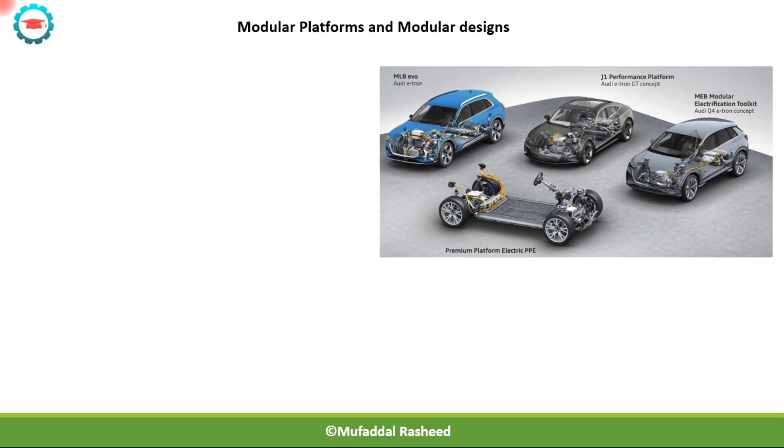Now we will have a look at a very important concept in advanced automotive product development, which is modular platforms. Now the modular platforms are based on the concept of modularity, which is the practice of designing systems in the form of modules and attaching them together. Modular platforms are a cluster of systems which are bundled together and can be used for multiple vehicle products.

As you can see over here in this example, this is a platform. Now this platform will consist of many different types of systems. As you can see from this example, this becomes the base module, or it is called the platform. It includes the tires, the suspension, the powertrain, the steering systems, the supporting systems for the powertrain, the battery pack.

In this case, this is an electric vehicle, so it will have a battery pack, and it will have the frame which houses the batteries, and the subframes which have the powertrain as well as the suspension system. So this becomes the base platform of the vehicle.

Now this can be adopted to many different types of vehicles. As you can see, it is adopted to this vehicle, and the other two vehicles are also having the same platform. The only difference over here is the body and the cabin. The cabin will be different, but the base, the foundation of the vehicle, which is this module right here, will remain the same for all the three. This of course is a very advanced design methodology which is used commonly in OEMs today.

Now this requires that you design systems in such a way that you are adapting them to multiple different types of vehicles. So in one way the design has to be rigid, in the other way the design also has to be flexible to adopt different types of vehicles. Now to do this is very difficult, and hence a lot of effort is put into the design phase, in which these modular systems can be developed, which can be flexible and adaptable to many different types of vehicles.

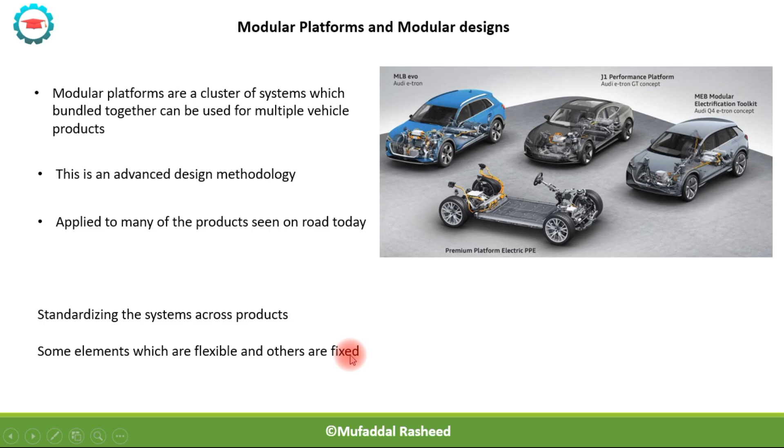The modularity concept of having various types of modules which can be mixed and matched with each other to get different types of products is a very important and powerful philosophy which is applied in this kind of design.

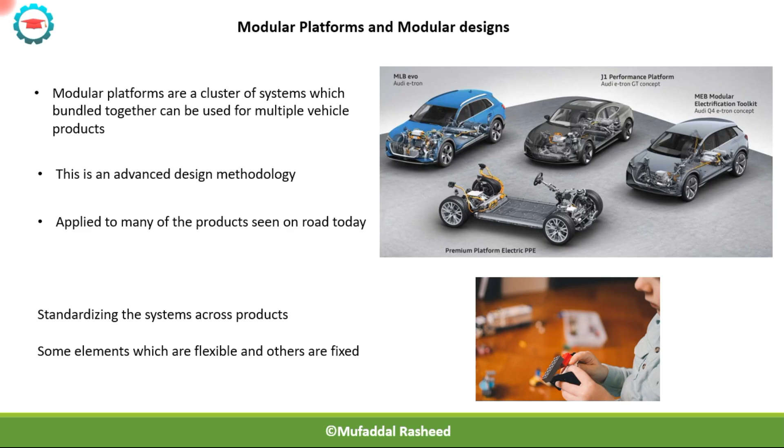Now we will have a look at the key characteristics of a platform. The platform forms the foundational structure of the vehicle, including the front, rear and the underbody. This is applicable to both body on frame and monocoque types of vehicles. Monocoque vehicles generally would include portions of the body or BIW as well, along with the base structure of the vehicle. We will be able to understand this with examples in the coming slides.

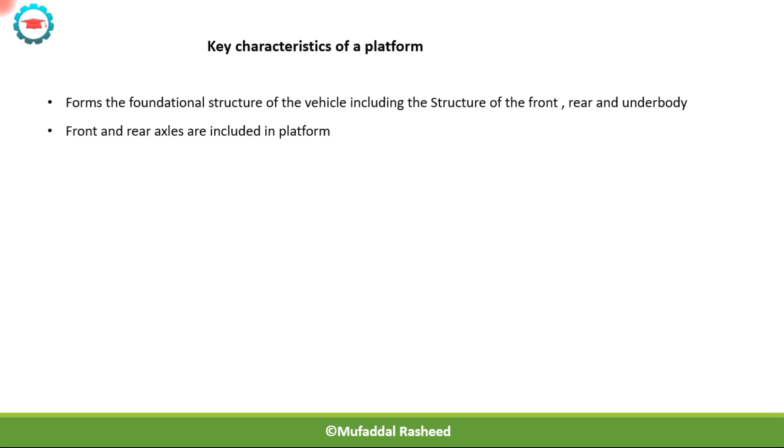Another key characteristic is that the platform will always include the front and rear axles. They will always be included in the platforms. The steering mechanism and the technology of power steering will also be included, as well as the front and rear suspensions.

So front and rear suspensions are an integral part of the platform, along with the subframes which are going along with them. So the suspensions are mounted on the subframes. Those subframes will be included in the platform.

Then the powertrain package. The powertrain package, the orientation, the variability of the subtypes of powertrains are also designed for in the platform. So for example, if you are having a variety of powertrains, which is normally the case in today's vehicles, which are having like 5 to 6 varieties, then all of these variations of these powertrains are designed for in the subframes for the platform.

Platform sharing is a product development strategy. So planning for it is done in the very initial stages of product development. So before the business case has been prepared, the platform sharing strategy has to be in place. Now, this is generally applicable for new product introduction type of projects. So when we are developing new types of products for the market and introducing them into the market, that is when these platform sharing techniques are the most useful.

This can lead to either simultaneous development of multiple products on the same platform. This can happen, or it can be a staggered development in which one product is first developed and then later the second product is developed and then even later the third product is developed. So there can be staggered or simultaneous product development which is happening for multiple products.

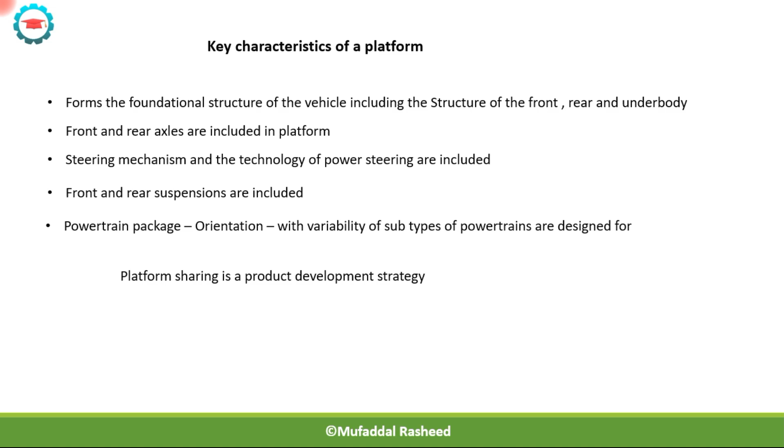These challenges are generally met by providing flexibility in the design. For example, the flexibility is provided in terms of the wheelbase, the front and rear overhangs, the wheel track of the vehicle, the overall width of the vehicle, and some other vehicle specifications. So all of these are kept open and can be tweaked and varied for various types of vehicles. Of course, this kind of a design which is flexible and also standardizes a lot of parts of the platform requires a lot of thought process in the initial stages of the concept development.

So the performance attributes like peak power, torque, and other attributes may differ between the vehicles, but most of the basic features, the foundational features, and the static and dynamic behavior of the base structure remains similar. So because of the varying body types, because of the varying weights, and because of these varying vehicle specifications, there will be differences in the performance attributes of the vehicles, and also there will be differences in the targets which are set for the performance.

Platform sharing is done between vehicles of different types, but the variation of the type of vehicle will not be very great. For example, we will not have a platform sharing strategy between an off-roader and a hatchback. That is a very difficult strategy to meet because the requirements of an off-roader might be very different than the requirements of an entry-level hatchback. So we can have a common platform between entry-level hatchbacks and entry-level sedans, but we cannot have a common platform between a heavy-duty SUV and an entry-level hatchback or a sedan. That is because the type of loading pattern, the type of usage pattern will change drastically between the two.

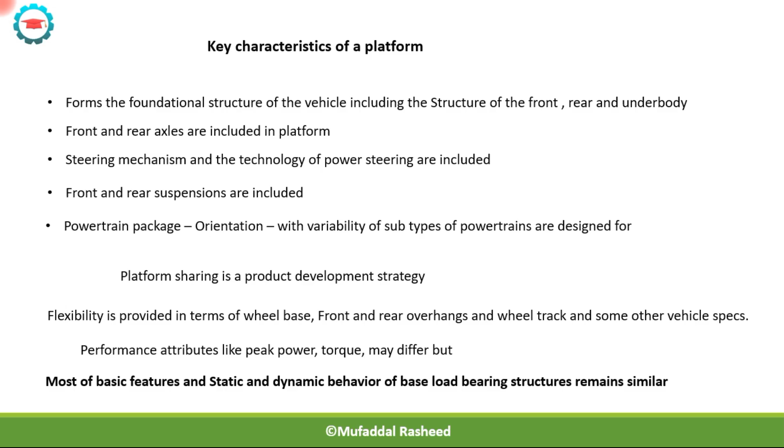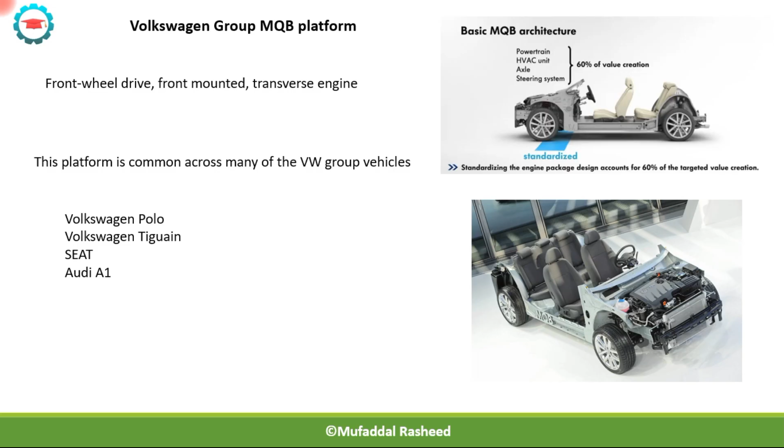Looking at this, we can appreciate the cleverness used in the design and how one type of design can be applicable to many different types of vehicle models with maximum standardization. Now let's have a look at another Volkswagen Group platform, which is the MLB platform. This MLB platform is a shared modular construction for longitudinal front engine automobiles, so automobiles which have the front engine but longitudinally placed as shown over here. We have seen earlier the difference between longitudinal and transverse engine placement. So this platform is mostly suitable for longitudinal engine placement.

Vehicles like Audi A4, Audi Q5, Audi A6, A7 have this MLB platform integrated. All of these vehicles use the core matrix of the MLB components across a variety of products. The MLB can be adapted to a variety of powertrain mountings. So if there are different types of powertrains with different types of mountings, that flexibility is inbuilt into the platform. There is a flexibility of body style and powertrain size inbuilt into the platform, which allows it to be used for many different types of vehicles with maximum standardization.

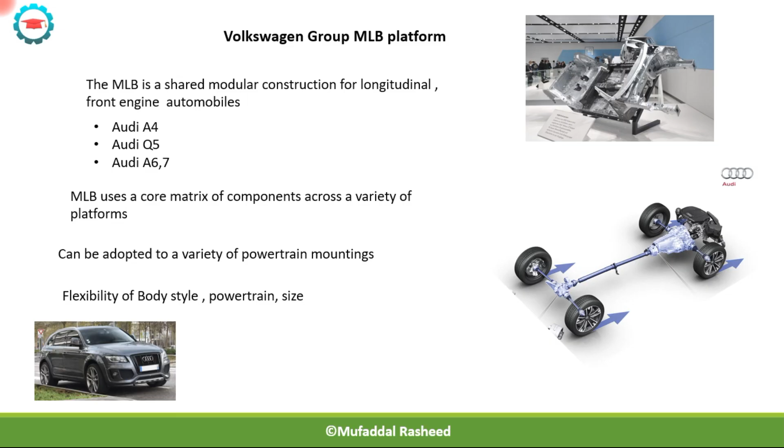As we have already seen, full frame based vehicles are generally large SUVs and pickup trucks. The manufacturers of these large SUVs and pickup trucks very widely use this platform sharing method, because it's much easier to have a single frame manufacturing setup and use it for multiple products than to have different assembly lines for each and every product.